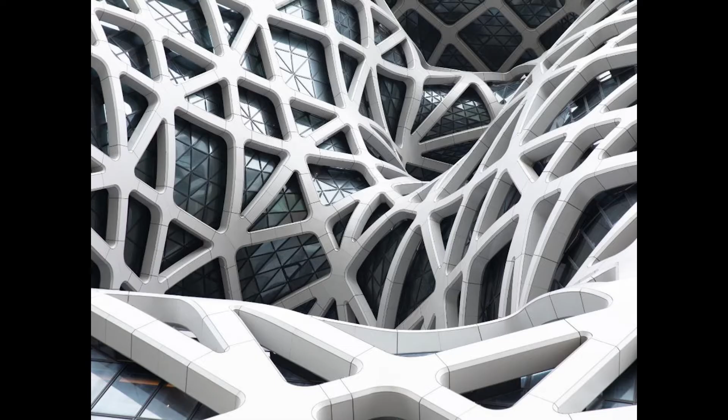Dragages was lucky to be the contractor in charge of this construction, and we had to manage this incredible logistic challenge. And for that, we embarked on the BIM journey. So we set up a 3D coordination for this project with the objective to secure 100% of the off-site fabrication by resolving all the design coordination and all the construction sequence in advance to make sure the right piece comes in the right place at the right time.

That wasn't an easy task because we had mostly 10 main contributors from the concrete to the steelwork, permanent and temporary, and all the facade systems to be put in place. So we had to set up the minimal rules and standards for everybody to work properly together and the geometry to be properly managed. Now what we decided is that each contributor would be working using their preferred standard and preferred format. And that's not an easy choice because we had to manage everything down the road and make sure everybody talks well together. But we made that decision knowing that it was the best choice to guarantee the accuracy of the geometry from the design down to the production.

So we allowed that. The team we had set up managed some BIM modeling using Revit, but we mostly had to take care of the coordination and the check of the model in Navisworks. And in doing that, what we did essentially was to assist our subcontractors by managing their production process and doing some quality checks in the meantime, making sure everything was correct. And if you think about it philosophically, it's not too different from what we do on site. As a contractor, we make sure that the production process is carried through efficiently. We make sure that the quality standard is met, and that's exactly what we did in BIM. Just it was virtual, a kind of digital pre-construction. So we were relatively familiar with this process.

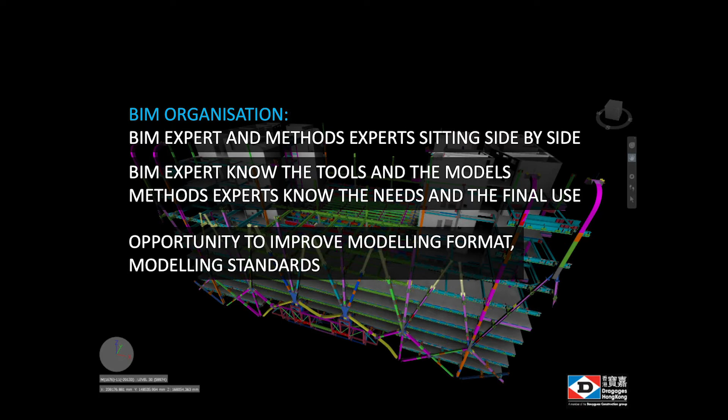The organization we used for this was to have, simply put, the BIM expert and the method expert sitting side by side. Our BIM expert knows what the model can do, he knows the technology, and the method expert doesn't know BIM, but he knows what he needs at the end of the day, he knows what he needs to use the information for. And when these two guys sit together, well, that's when we create value, that's when we are able to improve our modeling practice, to improve our standard, to deliver something that actually meets the demand in a more efficient way this time and the next.

So of course in the future we try to not have two different people sitting side by side and actually integrate this process. But you imagine that was 5 years ago and was the beginning of the journey for us. Also at the end of the day, everything you see on the screen now turned to be put into a method statement, printed on paper. And it's a little bit of a dissatisfaction to see 3D modeling put on paper, but that was the most efficient way for us to communicate it.

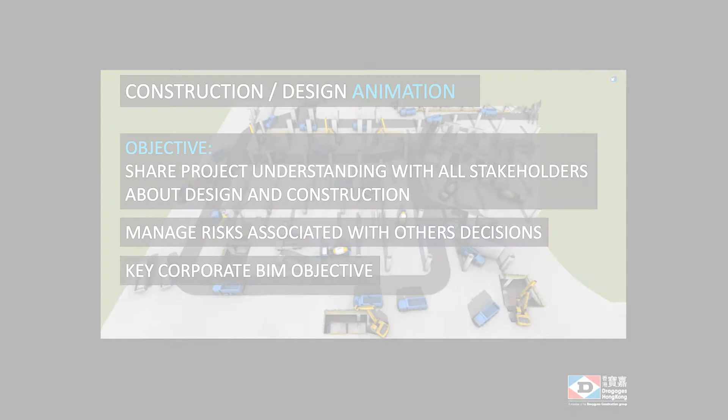That was asking the question, that's a starting point, how to make BIM more available through the project team. Not only through the project team, but also to non-technical people working around the project. As an engineer, I know how to read a cut section, I know how to read some very technical details, but that's not everyone. But as a contractor, it's very important for us to make sure that the whole team working with us on the project is up to speed with all the stakes of the project and that we have a very efficient, in-depth understanding. And for that, BIM is a key tool.

We use design and construction animation for a long time to make sure we can manage the risks associated with other decisions. When people around you understand what you're going to do and exactly where it's going to take place, then it's easier to get some feedback and manage their decisions in the process. It's so important that we have decided to make this a key corporate BIM objective. We have set up a dedicated team in the office, and the methodology is constantly evolving because the software we use is constantly evolving, and the projects are always different. But at the end of the day, what we need to make sure is we're properly understood by everyone.

There's again an opportunity factor when we develop this technology, is that once we want to do some 4D modeling as fast as possible, we internally need to develop some standards, some common practice on how we set up a BIM model and how we set up a program. And these standard practices, step by step, build up a comprehensive workflow, which then can expand to other standards like quantity takeoff. And before you know it, step by step, you're going into a full integration of your workflow, of your process into BIM. And this really brings us to another level of maturity. We may not be there yet, but it's important to appreciate that once you put the first steps in, then the journey just starts and you keep on going.

The project objective was to share the same direction across the project, from the consultants, the client, the contractor, the subcontractor. It's a design and build, so we were lucky to be able to start the project in BIM from the very beginning. And we did that setting up a comprehensive BIM management. We made the decision to model everything internally, and that's not an easy decision because, of course, the team that it implies is quite substantial. It's relatively resource hungry to build up all the BIM model for a building like that. But we also believe that that's the best way for us to get some first-hand experience on how we can set up good BIM processes, what works, what doesn't work, and to improve time after time.

We were lucky on that project to have BIM ready very early in the process, and this really helped us support some key technology and some new adoption of new technology on the project. I mentioned previously 4D modeling, which is now a staple on most of the projects we work on. Also virtual reality, to give everyone a good understanding of the geometry.

But what we implemented, that's on screen now, is real-time rendering. This for us is really a game changer for all the interaction with the clients, interaction with all the end users, everybody not really technical in the team. Because we can now have live reviews every week, every 2 weeks, where we sit everyone and we walk through the model. If you want to see what's happening in this room, let's go in this room. I give you a look. If you want to display something, to remove something, we can do it on the spot.

And we gained the time that was previously necessary to prepare an animation, which was actually not really showing what you wanted to see. This is really a definitive help in the decision-making process, and it changes the way decisions are going to be made on the projects.